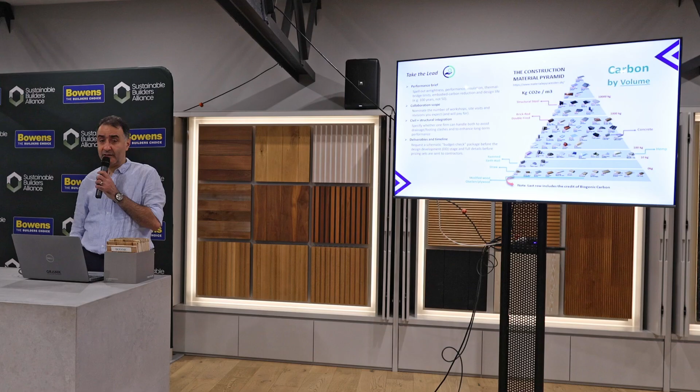Also, if you want a good outcome with collaboration, workshops, meetings and talking to people, this is something we're doing these days that came from the architects to us: we give a schematic plan, a concept design, and that can be used for early costing and finding areas of the design which require more attention, in terms of thermal bridging, thermal modeling, or costly structural items. That helps - it's an additional revision at low cost that helps the project stay on budget.

We believe early engagement pays off. This is a sample of what we generate as a schematic design, just identifying the main structural members. This is the framing - if there's a freestanding blade wall, for example, we detail how this is to be done, or how it can be done without steel.

And then that's enough for a carpenter or builder to price the whole framing, with a schedule including the studs and other framing components of the building. Same for the foundation - it doesn't take much time, but it also includes early engagement, workshops, talking through, and quite a lot of phone conversation with the other consultants and the builder as well.

So early engagement helps the project stay close to budget, and the performance the client wants can be maintained. It's a chance to do cost refinement early in the design, instead of going to site and making those changes - it's much easier when the project is at an earlier stage.

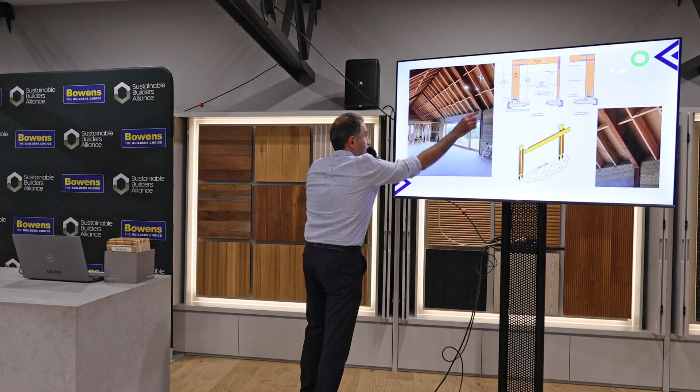So it's a custom design connection. This is a bit of time consuming work for an engineer, so they need to spend extra resources with that one. But for a job like this, nothing else could have been done. It's a very large, open, long living area.

We use the kitchen pod as well to stabilize the building, with some plywood added later to the building as well. These are solutions that maybe need a bit more experience to implement, but using off-the-shelf product is quite easy for every engineer. They can specify that one.

Vertical trusses, this is something we've been using for a long time, and it's a very good option. PT brace, which is a light gauge steel type brace, we use as our last resource. It also has tables for capacity and is available in the market, coming in small sizes like 300 wide or 350 wide, up to 600 wide with great capacity that can be integrated into a timber frame. That's a very easy use for an engineer, for houses that don't have enough nib wall to brace. But it's also light gauge steel, which we don't suggest that much.

But if the project engineer is keen to implement, you can do vertical trusses instead of timber trusses, instead of steel trusses. It can be detailed same as a steel truss, but with timber, all screw fasteners, LVL members, some tie down to the building, and so on. It's a bit of a time-consuming element to design, but it's an engineering first principle design.

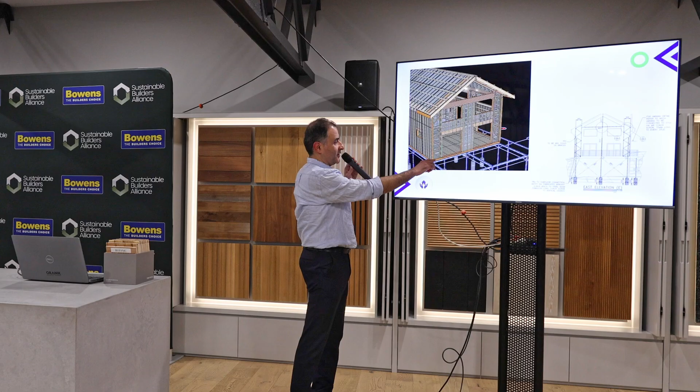These are not easy jobs, to be honest, in terms of the design, but it brings quite a lot of joy and experience - it stays with you forever. Whenever I come back and look at this job, I really enjoy what we've done.

I'm sure many people in the industry, if they know the client, the project team is open for more work from the engineer, they're happy to do that. But it's a bit of time involved, so it has to be compensated by the project owner.

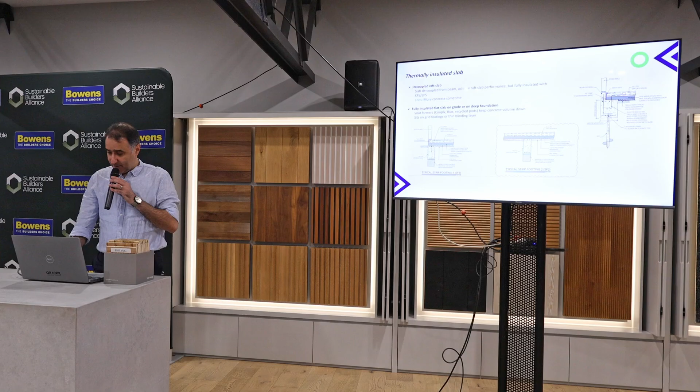Am I off the time, Hamish? How much? Okay, so we'll go for a slab a little bit.

Thermally insulated slab - Hamish mentioned to me specifically talk about that one. This is called the decoupled slab. In the snapshots here, you can see there is a separation between the footing and the slab, with full insulation in between. Sometimes you need to tie the slab to the footing, depending on the reactivity of the site. Sometimes you can avoid that. Sometimes you need to protect the slab edge because of the soil above it or site conditions, but it can be done. It's not exactly Australian standard, but can be translated into the Australian standard.

It's a very good system for a fully insulated slab. It's a bit more concrete - that's the con of the project, because the stiffness of the footing has to be increased to compensate for the separation between the footing and the slab for highly reactive soil. So that's where you get more concrete, but it works well when you want a fully suspended, fully insulated slab.

Another system that's quite easy to insulate is a flat slab system, the waffle slab being the most common one, but there are also good alternatives like Cupolex, Bi-X, or recycled pods like the waffle. There are quite a lot of them in the market these days. In the next slide I can show you a little bit of those.

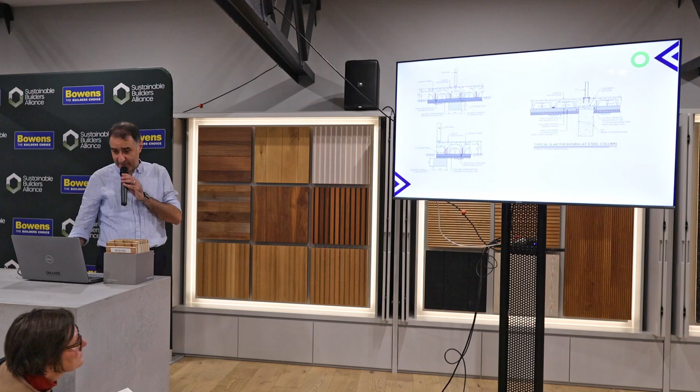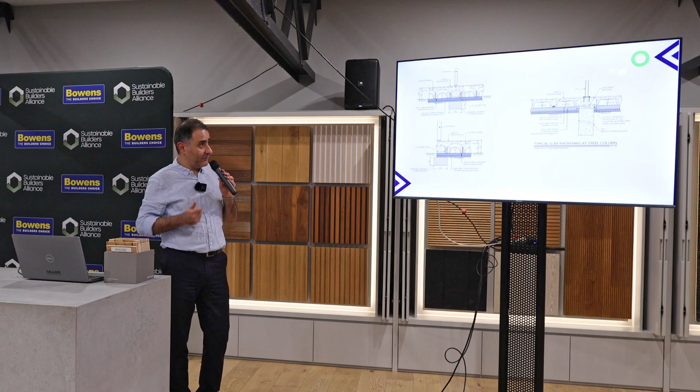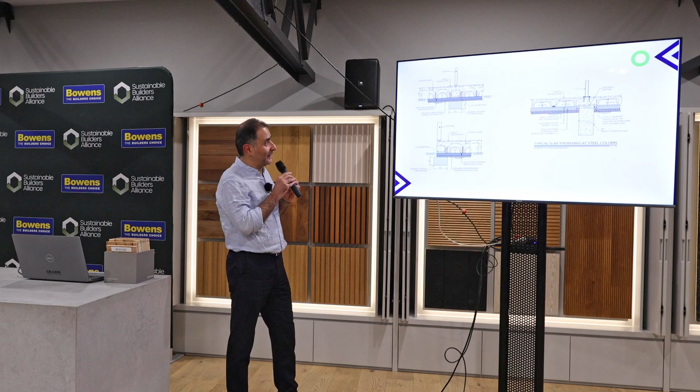The Cupolex is basically a raft slab system, but it's flat because you have a plastic void former between the beams. Bi-X has some similarity to the waffle, but more ribs because the pods are 750 by 750. Anyway, the good thing is they're all flat, so the beam doesn't go up and down. They're all designed as standard certified systems which we can adopt as engineers - we don't need to design them specifically. It's a product, similar to waffle, that comes with some design built in. It's all about the detailing and where you have it.

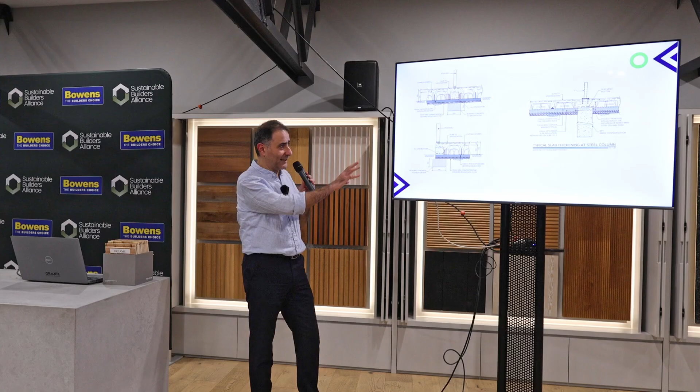For example, here we have a large load from a steel column on a thickening. A pod is removed, but we are accepting some thermal bridging in that detail because we don't want our XPS to be over-pressurized in that area. Most projects can accept thermal bridging like this.

But sometimes, instead of doing that, we put a large pad here - this is a load-bearing stud wall, for example. We put a larger pad to spread the force over the XPS, so it doesn't reach its capacity or near its capacity - no thermal bridging here. You can see in the other detail there is a bit of thermal bridging.

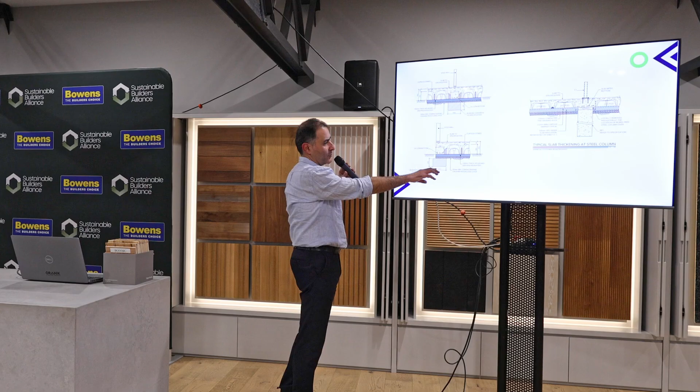Same here - you have a blinding under the edge beam because we want the edge beam to go onto a stiffer material. Our slab panel can sit on 50kPa or natural soil on many projects, but we want the edge beam to go deep. So here we put some sort of blinding pad or blinding strip under the edge beams. This achieves it well - it's a very easy solution.

You can offer this to your engineer, and I don't think there will be many objections to that type of detailing.

One of the reasons many people like to use concrete slab is the performance of the concrete compared to a subfloor system. I understand concrete stumps and the stump pad, a small size, may not perform the same as concrete, but there are really good alternative products for a subfloor. I'm a big fan of a subfloor because it has much lower embodied carbon, much less volume. You can go concrete free or use much less concrete.

So screw piles are getting really big hits in the subfloor system, with some pre-made off-the-shelf brackets which go over the screw piles, screwed or bolted, sometimes welded, and then accept a steel bearer or timber bearer.

Capacity-wise it's much higher than the stump. You can easily get 5 ton capacity over screw piles compared to like 1.5 ton over a single stump. So it means you can use long span bearers, with less footings. And because they usually go more than 2 to 2.5 meter deep, they perform really well, passing the reactive layer of the clay so you don't get much movement.

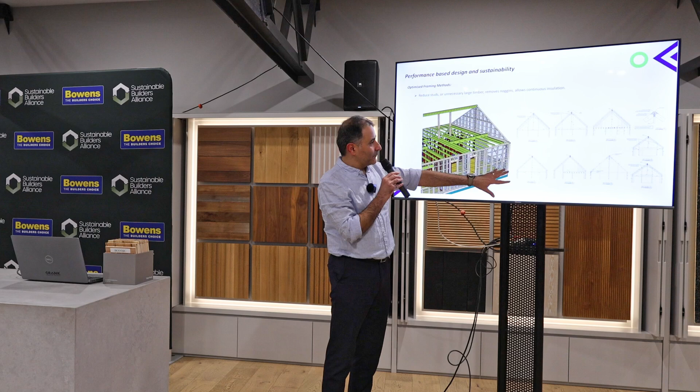So we didn't put in a lot of underpurlins and props like the conventional system. A truss roof wasn't an option, so we used some larger LVL columns with tie backs to the frame. It was braced and prefabricated and built. The other one is a 300 wide, again a hempcrete building, but we had a very high end gable wall.

We had the whole wall that has to be framed. We used 300 high column because from the ridge point to the bottom was around 6 meters, even more than 6 meters, to be able to frame that wall for lateral stability. So these are the things...

Sometimes these are missed, and then you get a stud schedule in your engineering frame. It tells you 90x45 MGP10 up to 3 meters at 450 centers. You are on site and you see there is a wall which goes up to 6 meters, which has not been framed. So if you read the plan, maybe in the beginning, you can identify that one. The stud schedule for this type of project is not enough. It has to be designed again.

It happens sometimes clients want to use a specific product like hemp block, which has to be framed. So be careful with hemp block. It's a very good product in terms of efficiency, but needs a lot of framing inside. This job came to us in 2021. We did a full framing of the wall all around it to be able to use the hemp block, but the framing cost was quite high, so the project didn't go ahead. I know some people use it in Queensland. We were not lucky enough to build one in Victoria yet.

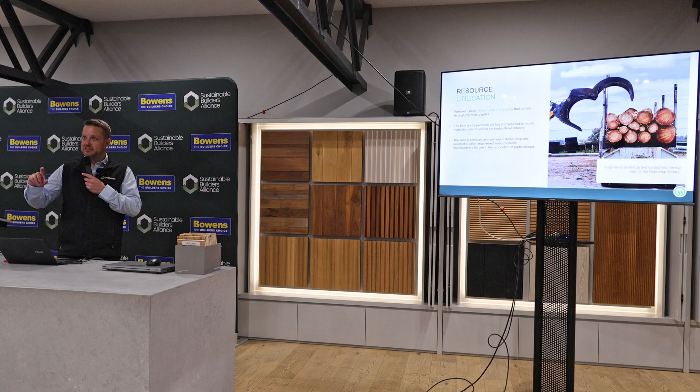If there's a defective log, that gets marked, and that recoverable volume gets taken off our mark. When the log goes through the debarking situation, it goes through a scanner which is calibrated regularly via the WA government authority, and that scanner tells us the absolute recoverable volume from that log. Then it's up to us to ensure we use every bit of that log we get.

When the peeling goes through, if there's a defect in a log, you can get little bits and pieces that don't look right. What we actually do is run it through another system - those sheets go off into a separate line where we cut out the defects and start taping that into another full sheet of timber.

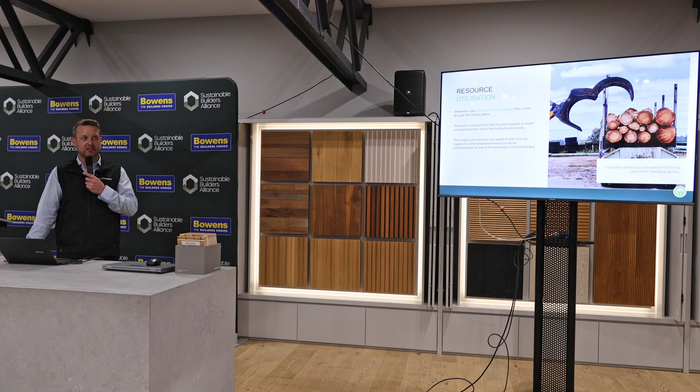So we're actually gaining, since the changeover in the mill to our new system, about an extra 6% of recoverable volume out of that log that we were previously losing to, say, particle board manufacturing.

What have we got? Our LVL sections go from 90 up to 600mm. It's probably 90 up to 400 off the shelf anywhere in the country. The 600 mil can be a special order, but realistically Wesbeam's advantage over all our competitors is we can make pretty much any section size up to 1240 mil deep.

And 63 and 84 mil widths as well. We've done projects with Bowens where we've made 720 by 75 times 4 beams that created big stadiums for schools and the like.

So up to 17.8 metres long, and up to 12.6 metres long off the shelf in our state. Most Bowens stores carry up to about a 7.2 metre long beam in some deeper sections - your standard garage lintels and the like that are regular section sizes.

So we've got all of that in 35, 45 and 63 mil in our LVL. The I-joist ranges 200 to 400 deep - we've got 240, 300, 360, 400, and we've also got some key set-down joists in the 255 and 265 depths.

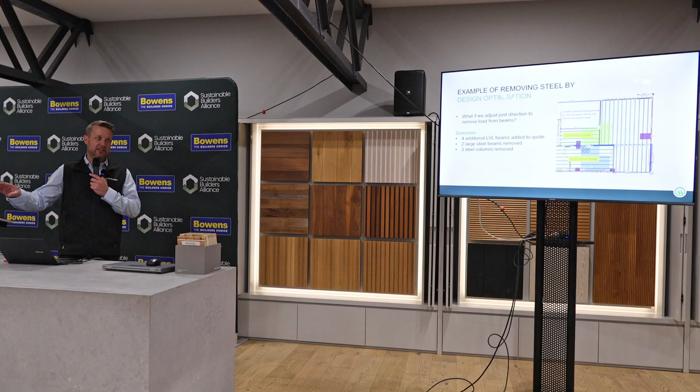Just a quick example here: the joist direction heavily loads the beams, hence steel required. Our team looked at this job and Terry would knock this out in about 25 minutes, free of charge once again. What if we change the joist direction and remove the load from these beams? What's the outcome? Four additional LVL beams added to the quote, two large steel beams removed, and three steel columns out of the job. So this is the sort of stuff they can design the house and then just muck around with it in the space of like 20, 25 minutes. I think we did one sitting in a cafe for a major builder a couple of weeks ago and removed four steel beams out of that job just over a cup of coffee.

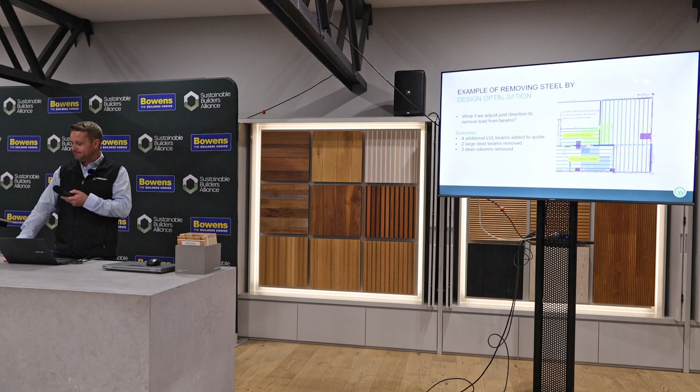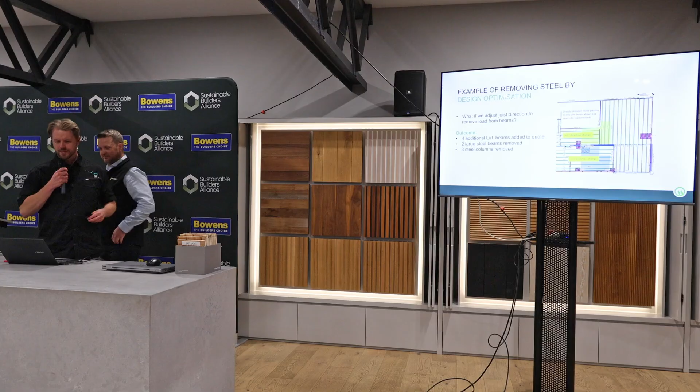Video, mate. Do we want to take a quick break or just keep going? We'll keep going because everyone probably wants to get home.

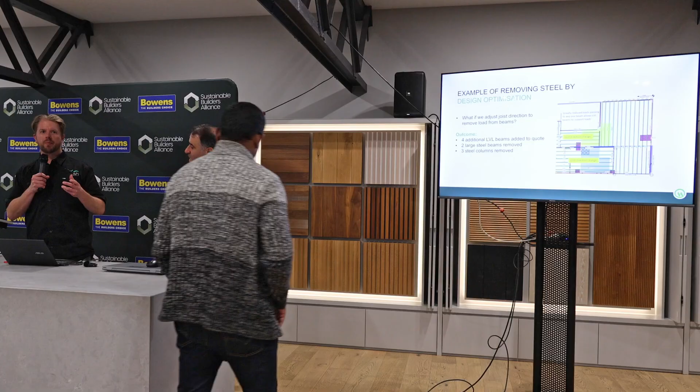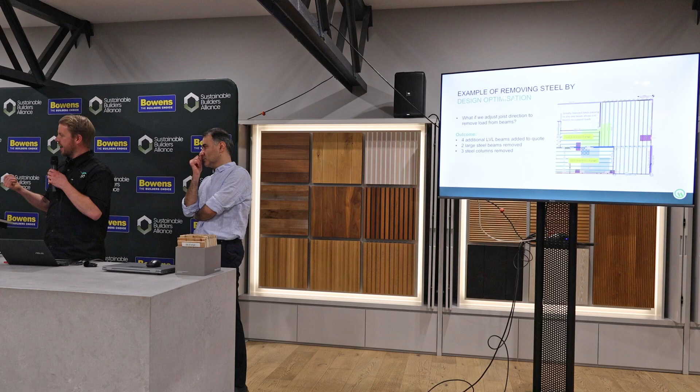I'm going to invite Brad, Adam, and Yashar back up. If anyone's got any questions to throw at any of these guys, shout out. We do have something marked up on this whiteboard that we actually had a question about last night on a Future Builder chat, something we would go through with the engineer to workshop. Yashar talks a lot about collaboration, and I reckon Brad and Yashar can probably demonstrate exactly what we would do if we ever came up with a question like this.

So the backstory is it's a passive house. Jess from Coombes-Pearce had done the modelling on it and was showing that the concrete slab was still at 12.5 degrees, and we were trying to figure out how we would introduce more insulation into this particular design while still maintaining the structural integrity of the building, because there is a retaining wall, and with a retaining wall you need quite significant footing. So how are we also insulating that slab while still maintaining the structural integrity and meeting all the performance criteria we're after?

So I'm going to chuck it over to Brad and let him run this one. I'm just trying to draw it so that everyone can see. Does anyone have any questions first for Yashar and the team about anything they've talked about tonight?

Just wanted to know, is that getting those flexible insulations, the use of aerogel blankets? Aerogel insulation, yeah, for what purpose? For the floor. You can go flexible, you don't have to go to a fixed one. And the same for the columns, you can insulate the whole column around it.